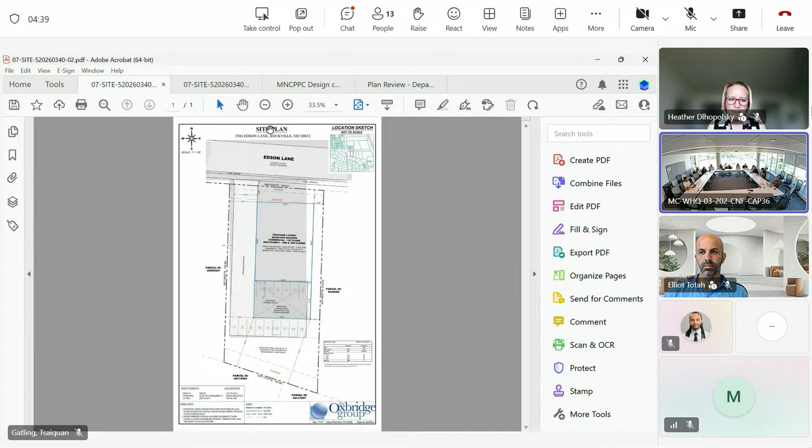Number 2 for DRC, 5506 Edson Lane is a concept plan in the West County area, and for your information, this meeting is being recorded. Go ahead, Tsaiquan. Good morning, everyone. I'm Tsaiquan Gatling, lead reviewer for this concept plan. The plan presented 2 concepts for the site at 5506 Edson Lane in Rockville, and you should have received comments on Friday. And I also followed up with design comments that unfortunately didn't make it into DRC, into E-plans. So I'll turn it over to the applicant for any questions they have.

I'll note as a concept plan, this application ends here, and we'll see if you come back in for a development plan in the future. So with that, I'll pass it to the applicant. Great. Thank you so much, Tsaiquan. Can everybody hear me okay? Yes. Okay, great. So Heather Dlhopolsky, land use and zoning attorney with Wire Gill. And I apologize, I'm getting over being sick. I also have Elliot Totah. He is the applicant here.

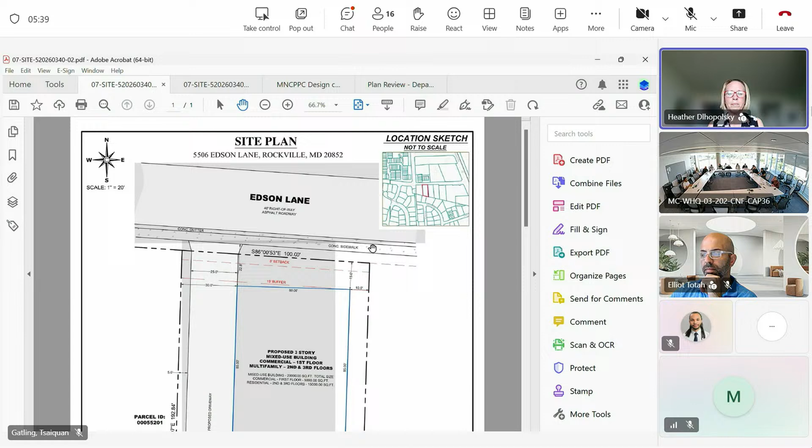We very much appreciated the opportunity to submit this concept plan. We received all of your comments and reviewed them. I think overall, we're definitely happy to see that the county and Park and Planning seemed supportive of rezoning here to allow development close to the corridor, Rockville Pike corridor. We did have some questions. I think some questions that are fairly quick. I think a few items that probably want to be the subject of more detailed drill down meetings.

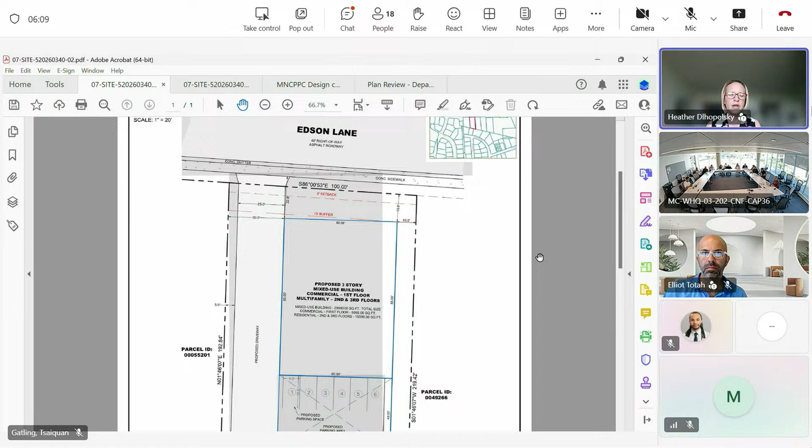So I will start to walk through some of the things that we thought within the 25 minutes that we have, we would have time to touch base on. And then at the end, I think we can just talk about what sort of detailed drill down meetings we want to set on specific items, and then what agencies should be in that. Before we dig in detail, Elliot, did you have anything high level that you wanted to add?

He's muted. Yeah. I saw a hand go up, so I think. Oh, there we go. There we go. No, perfect, I appreciate the opportunity. Thank everybody for the time. Heather, go ahead. I'll jump in as necessary. Okay, perfect. So probably in no real particular order here.

I think Tsaiquan, you had a comment suggesting that we pursue zoning to CRN1 rather than TF. And I think you said that we could maximize residential density to 1 and commercial density to 1 for maximum flexibility. And we certainly love that idea. I think our concern there was that if you look at section 535A2, which is the CR zone floating zone standards, and if a floating zone is not recommended in a master plan, the following density limits apply.

Because we are currently CRN and we're less than a ½ acre site, the total density can go up to a 1 FAR, but the C or the R component is showing as limited to only a 0.75, which would not accommodate the density here that we were proposing under the townhouse option. So that was our concern. Maybe I'm not reading it right and I'm missing something and there's more flexibility than I thought, but we just wanted to probe that a little bit.

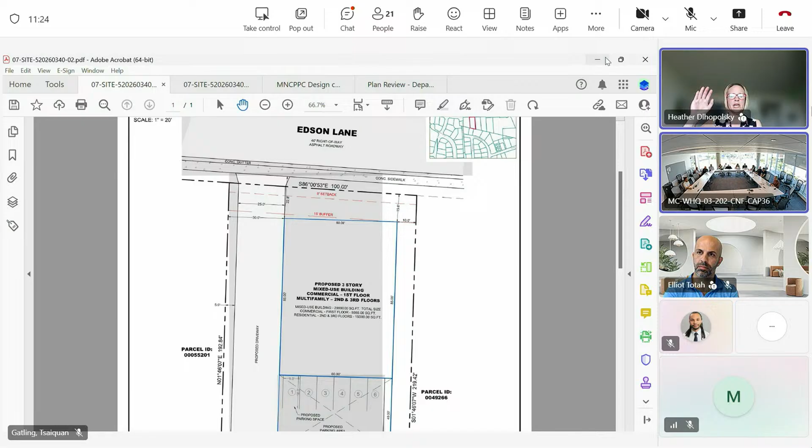I think that's probably actually something of a good segue into what we see as sort of the biggest issues here. So it seemed high level from the comments that folks are supportive of rezoning, but obviously, as with everything, the devil's in the details. And I think it's so common on projects, especially at the concept plan phase, that one of the main constraints that we're trying to hammer out are right of way and frontage improvements. Because obviously, if an additional 15 feet of right of way dedication is needed, then there were also comments about shared use bike path, sidewalk width, and then coming into the site itself.

There were numerous comments about if it's more than 4 units, and we were showing 6, it would need to be built to public road standard. But then there was another comment that actually suggested narrowing the driveway width to 12 feet, I believe it was, in order to allow for restructuring and relocation of open space. So there was a lot of, I'll just call them constraints comments. And we wanted to just probe staff's thinking a little bit more, both on the street frontage and right of way side, but then certainly coming into the site, which also relates to fire access as well.

I think this probably wants to be the subject of a more specific drill down meeting, likely with MNCPPC, MCDOT, and certainly fire access is a component as well. But just wanted to get staff's thoughts a little bit more in terms of the street frontage and then also, again, access coming into the site. Whoever wants to jump in.

Yeah, I can start. This is Florence Dwyer. So yes, like we said, if there's more than 4 lots, then it can't just be a driveway. It could be an alley, but it would have to be to those public standards. And then the dedication for sure will need to happen for the specific frontage improvements. We put in there what Complete Streets and the Bicycle Master Plan calls for. There's always a possibility of interim conditions, but we would want to start with what's in the master plan and the Complete Streets design guidelines. Okay. And for a public alley, if that's what's required to come into the site, do you happen to know the width that would be?

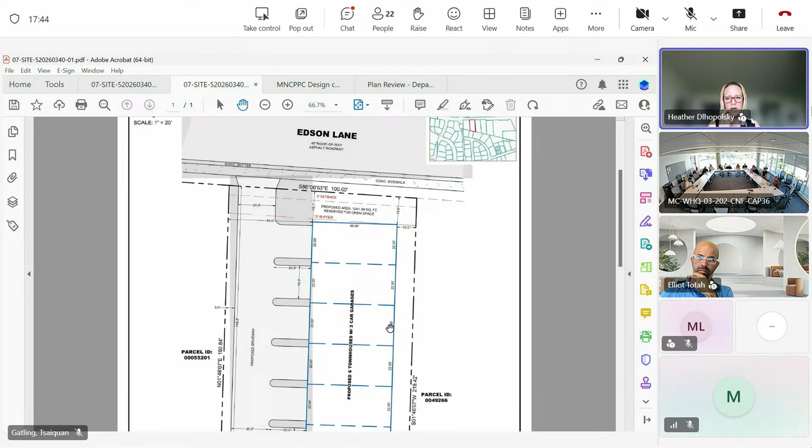All right. Just looking through, I think frankly a lot of the comments relate to or flow from exactly what we're talking about right now. It's like you start pulling the thread and all of the other pieces get involved. So the fire access issue, the number of units, whether it's public alley or driveway, obviously the open space then flows from that, because we're talking about site layout and where can we have open space such that it meets the definition of open space and is usable and accessible to the public.

I don't know, Elliot, are there other specific comments that you want to go over on this meeting? Again, I think probably these, I'll just call them layout and frontage issues, want to be a deeper discussion and maybe pulling in the civil at that point. But are there other topics that you want to cover on this meeting, Elliot?

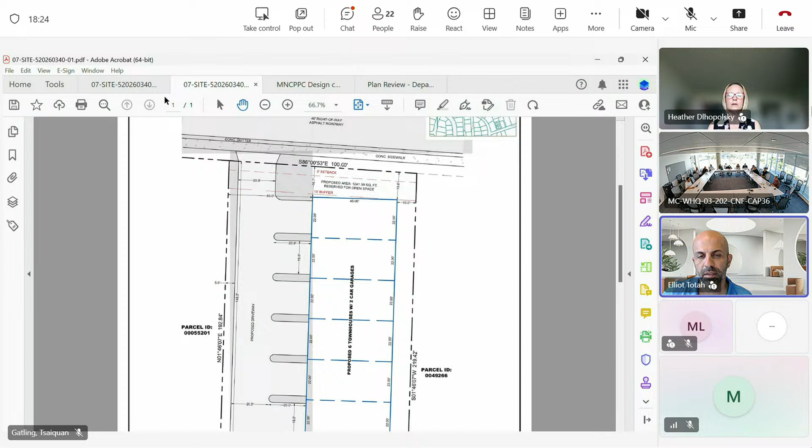I think I'd like to broadly ask, and thank you, Heather, for leading us so far. But I think the broader question I'd like to ask is that we submitted two concepts, right? Two different concepts, one townhome, one mixed-use multifamily. And I'd love to get the staff's impression. One contemplates remaining within the CRN zone, but simply adding density. The TF, obviously, moving to another zone entirely, and each one sort of presents its own unique set of circumstances in terms of the development limitations, the envelope, the fire access, etc.

I would love to get some perspective from staff generally. We only have a limited amount of time, and as to which one maybe strikes them as more viable, given the various constraints, both from a rezoning and land use perspective, as well as from an actual implementation of development, given all the constraints that we've started to speak about.

Sure. So I'll start with that and then pass off to my other planning teammates if they have any comments as well, but we wanted to just make sure you presented your reasoning so we can consider that. And I think staying within the CRN offers you some sort of flexibility that is currently there. And with the density change that Heather mentioned, you'd be able to maintain that flexibility going forward in terms of what can go on the site. I know our design team had thoughts as well, and if anyone else had comments too.

Yeah, this is Natasha from the design team. So as Tsaiquan said, we thought CRN will provide more flexibility for you. And it helps more in creating street-oriented development rather than the TF. And those townhome developments, you can still do under the CRN zone. So our suggestion is leaning more towards CRN. So that's our take.

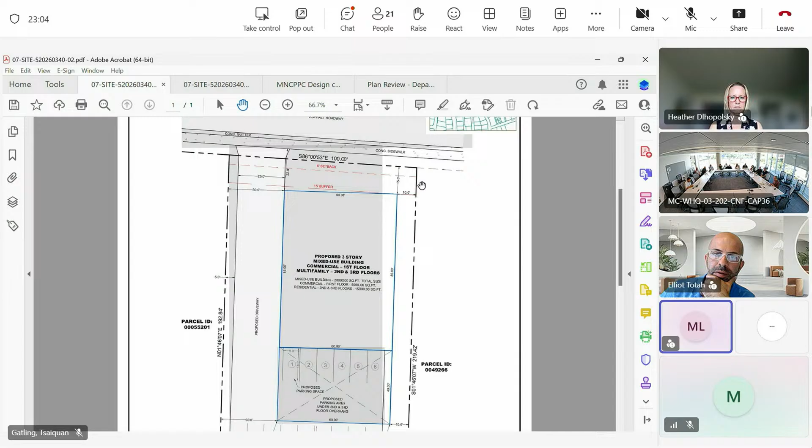Yeah, and I would appreciate, Marie, your two cents, since we do have a couple extra minutes, on the comment that Sandra just made regarding fire access when we do have the one building, how that's treated. So if you oriented your lobby toward Edison Lane, then she's correct in that you have to meet 50 feet to main side entrance door.

You also have to provide 15-foot clear and walkable along all exposed exterior walls. So you couldn't shove it up against the property line. And you need to figure out how to do that at the back. But she's definitely correct in that the primary truck access from Edison would probably be easier to accommodate with a mixed-use building.

15 feet along all exposed exterior walls, yep. Now, if you have no openings in those walls, then that requirement can be foregone. But if you have walls that have windows and whatnot for your residents, then they have to be accessible for ladder access, hence the 15 feet.

Gotcha. Okay. So for example, what's showing on plan view, I guess, right, 10 feet, it looks like we'd be having to shift that a little bit. We could probably work with 10. I cannot work with less than 10. Okay, good to know. So that'd be a discussion item, but workable. Okay, good to know.

And Elliot, just to add to what Marie said, so from a fire department access, as you heard, there's advantages to have the main door of the building on Edison Lane. And also from an urban design perspective, that's what we would recommend, that the front door of the building is on Edison Lane, so that pedestrians can have direct access to the sidewalk.

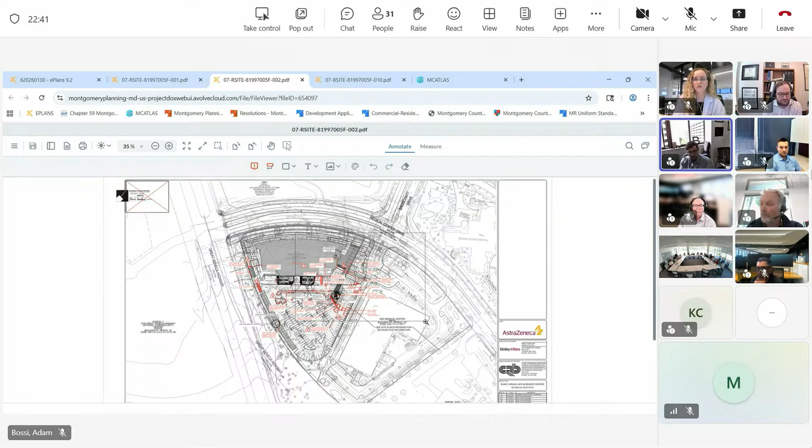Good morning, everyone. So we received a number of comments related to fire access, and we're happy to take these comments offline, but I just wanted to go over a general response that may clarify the existing condition out on the site. So much of the existing condition that relates to fire was approved during the site plan amendment C by previous owners and previous engineers. So we received a number of comments related to curb radii, fire hydrant placement, hose pull length. We're not altering that condition.

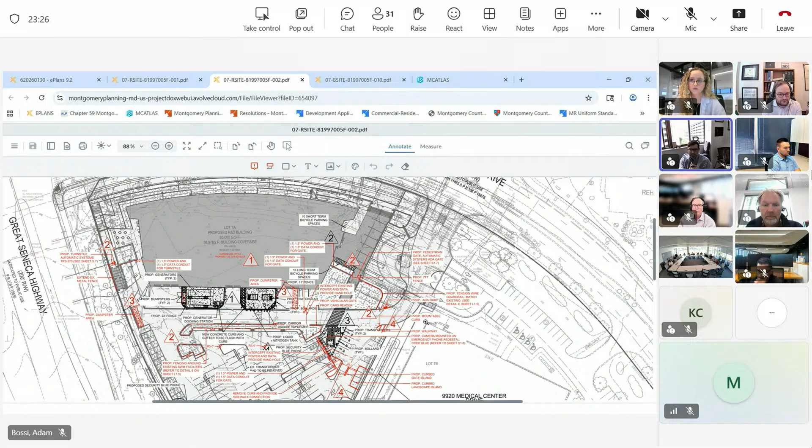It exists today. And I think some of the reason for the concern is the format of the plan. You can see, just due to the nature of this being revised a number of times, you have a multitude of existing conditions that overlap one another. And this also relates to the public open space comments that maybe we can get into later, but there's an existing photo that I can share that I think may clarify some of this. So this is a response letter we've prepared. If everybody can see this photograph. We can see it. Thank you.

Yeah. So this is the public open space area. When the project was originally entitled and permitted, there was a large circular drop-off area located here where I'm gesturing. And when we began work on the site, this had all been built. So some of the comments relate to fire access and hose pulls and such. So this is Marie LaBaw. All the comments came from me. I'm your fire department access reviewer.

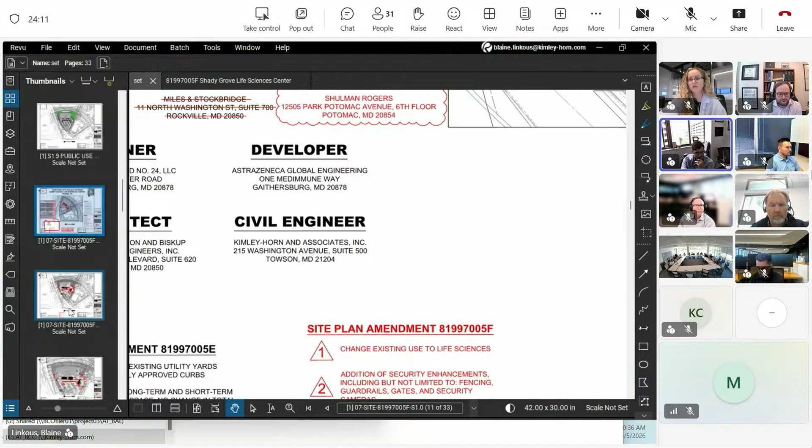When this was approved, it was approved with that circle, and it was approved to get the main lobby door of the building within 50 feet of edge of pavement. That does not appear to be the case today. I don't know how that happened, but you cannot make it worse than what the approved condition was. So if something was built that was not approved, that's not something that can remain. So we can take this offline. We can talk about that. That was the biggest hangup. Everything else pretty much looked like existing condition paperwork.

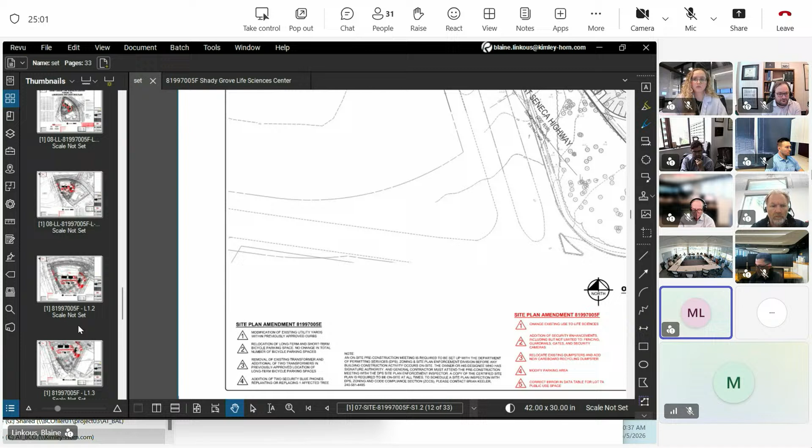But that circle and distance from main lobby door per prescriptive code should have never been further than 50 feet. Right. So we can work with that. We're not altering it. We didn't alter it. It was approved in Amendment C, and that same condition exists today. Well, we'll have to go back and look at my records because it shouldn't have been. Okay. Sure. Anything else for fire department access you want to discuss? No. Okay.

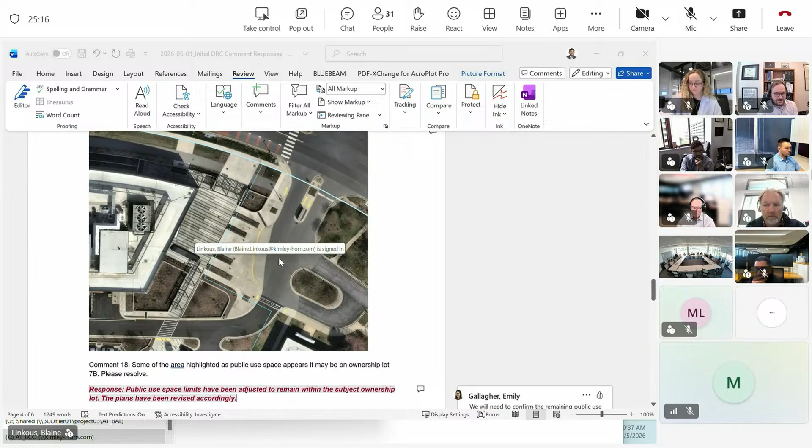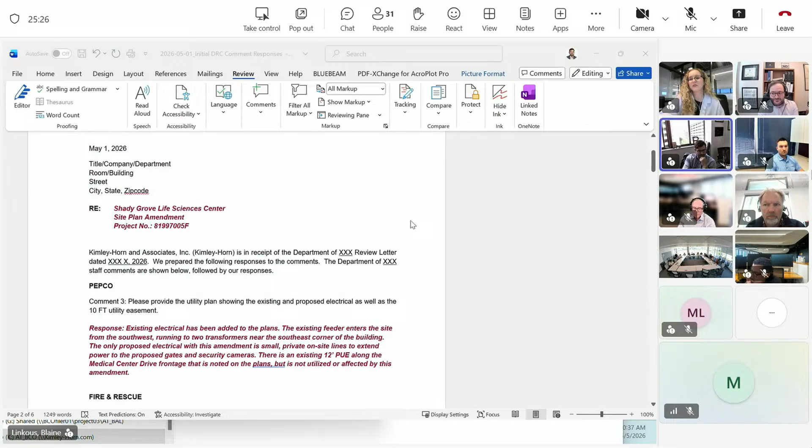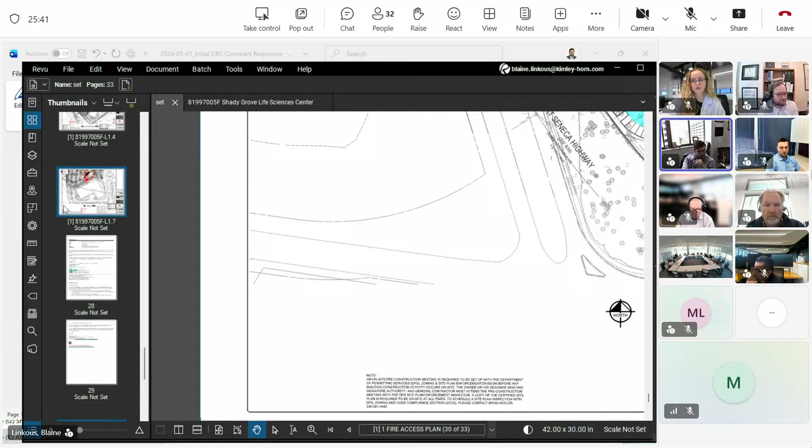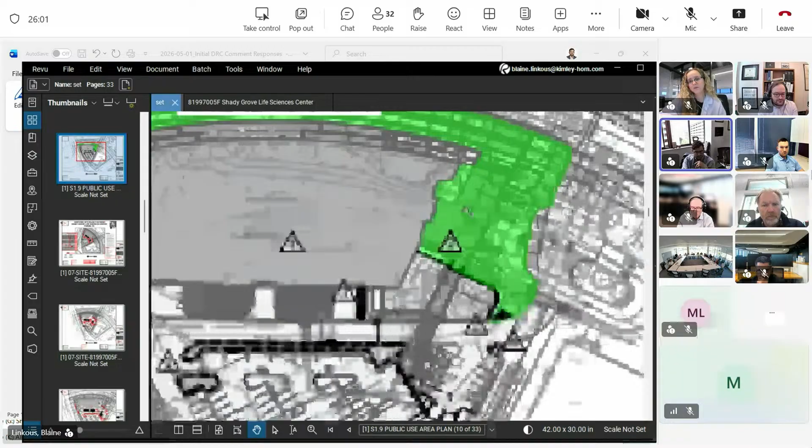Phil, should I continue on with the other comments that we received? Sorry, muted. I think we want to talk about public use space next. Yes. So I think the same issue, and I can share the public use plan that we submitted. The same issue may be throwing people off with the public use because there's a couple of issues at play here. One issue is the fact that we got the comment you can't have vehicle circulation in the public use space. That's because I believe the reviewer thought that this curve was a proposed condition. That's not the case. This is simply the existing condition that is all pedestrian hardscape.

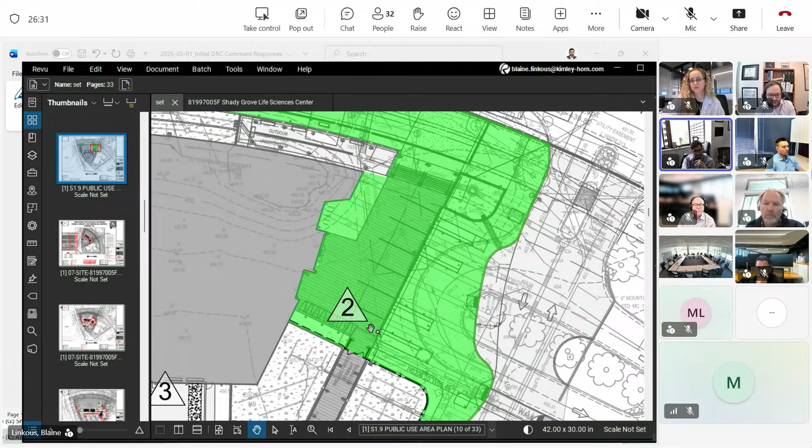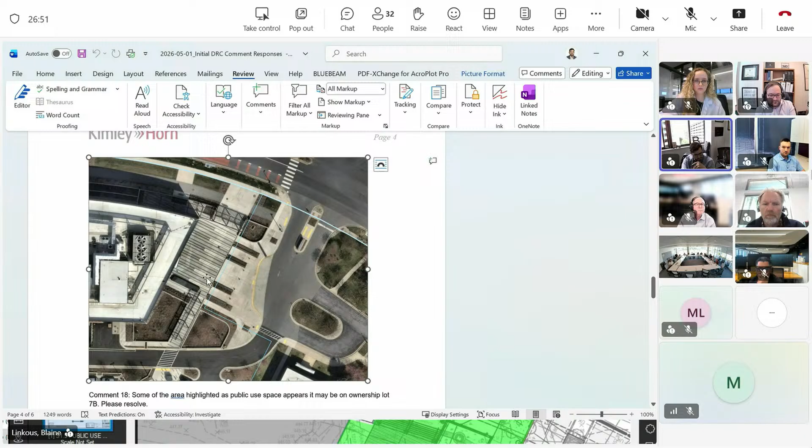These are not parking spaces. These are planters and hardscape features. And you can see that in the image. So it's just confusing due to the amount of line work and revision that has happened here. So they look like parking spaces on the plan, but they're not. They're pavers, and these are planters, and this is all the public use space. The other issue is we received a comment that said the ownership parcel, like the lease lines, are not reflective of the public use space. So we have more than the revised amount that was transmitted earlier in this green box, but not all of it is on the subdivision, lot 7A versus 7B.

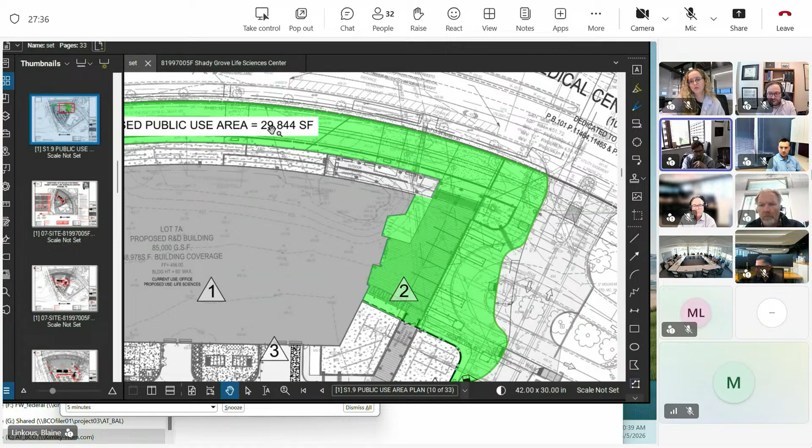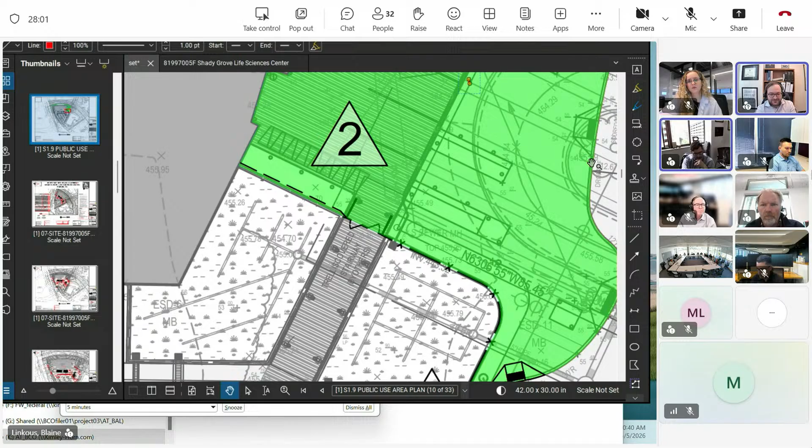So we just wanted to clarify, is that truly a requirement that we can only show public use area on our subdivision line? Because that subdivision line sort of goes, it's not consistent with a physical feature anymore. It's really right here. This line right here is the lot line. Wait, Blaine, just to clarify, when you're talking about lot line, you're talking about ownership lot line and not subdivision lot line? Yes.

Ownership lot line. Yeah, so those were comments from me, and it just sounds basically like clarification type things. I think you're gonna have enough public open space. You do need to show that your ownership lot 7A, that you are meeting or above that 24,719. That appears to be the correct number. I think you're gonna have that, but you just need to make sure that that ownership lot line is there, because there was the division and the requirement between the sites, as well as the kind of sum of both of them. So each one does need to stand on its own in that respect, with the way the different amendments have played out.

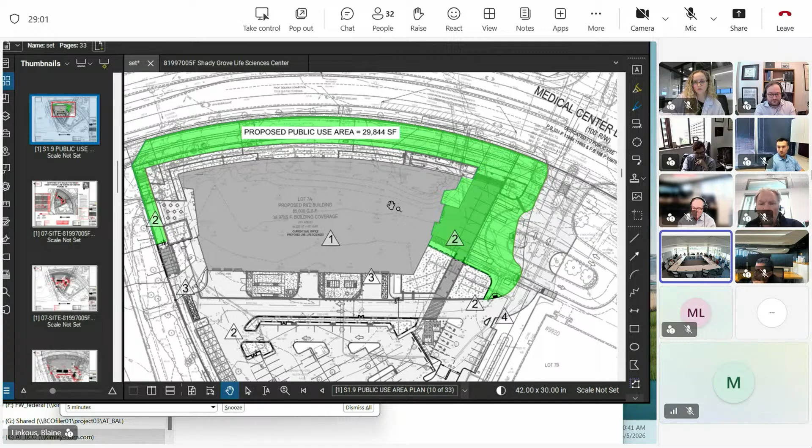So if you can show where that ownership lot line is there, and whatever is on 7A is on 7A. As far as regarding the vehicle area, if that's a pedestrian area, if there's a way to drop. Hey, if I can jump back in real quick, I was able to pull up my approval, and it does show shared access into the public space for truck access. Do you want me to share my screen and I can do that? Go ahead.

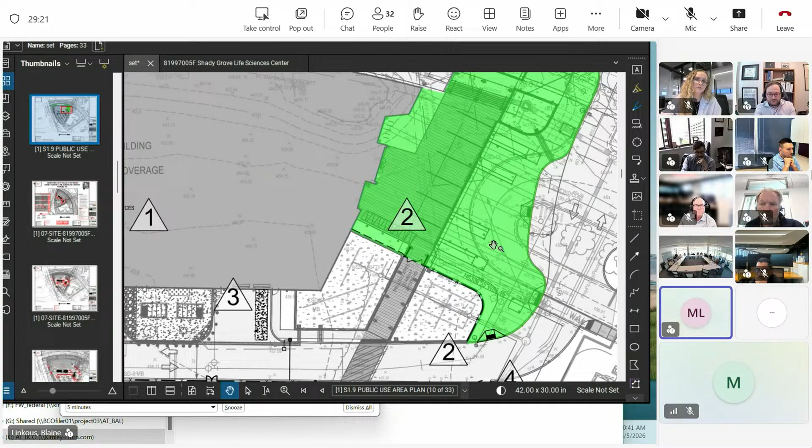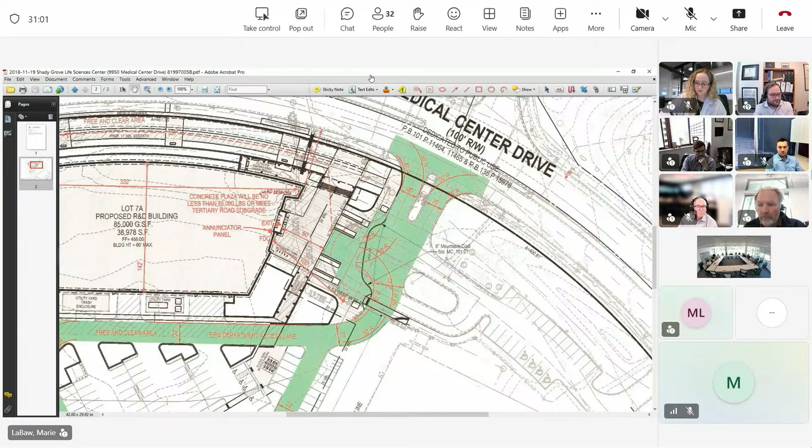And team, do we know if that curb right now is a mountable type? I believe it is. So it is mountable. You can drive up on that curb. Okay. So if this is what exists, this is what needs to be shown to me when you come back for your fire department access approval. Then tying it back into open space. Thanks, Marie. Thank you for bringing that up right now. Yeah. If anybody wants a copy of it, let me know. I'll email it out. Yes, please.

So I'd say with the green area that Marie was showing on her plan for vehicular movement, in that same area, that's the light colored pedestrian paved area. Remove that from the public open space if that's the necessary space for vehicular movement. But it looked like that would also come out of ownership lot B's and not 7A. So check that. And I'd be happy to look at that again with you too after this. Yep, understood.

Adam, I did have one question. I think there's just a typo on comment 19. What we got reads, please the Y right-of-way dedication and associated. I think there's maybe a word missing or a typo. Can you just please clarify that comment? Yeah, let me share my screen again. Thank you. Second here.

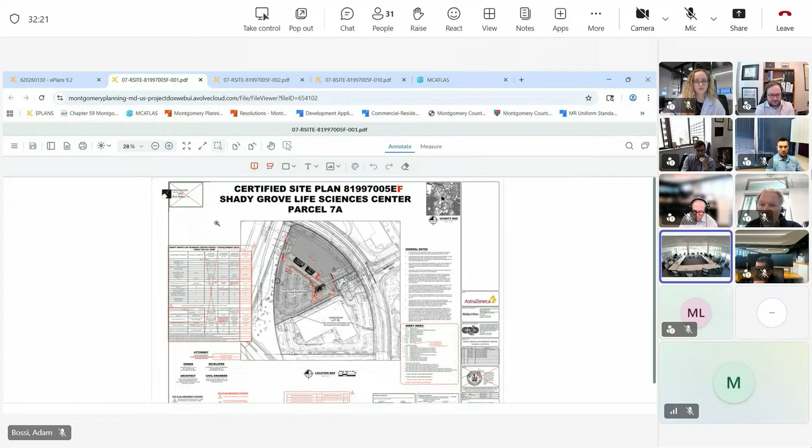So that had to do with revisions to your data table. There was a line on here. I'm not sure if this is something that tied back into the E amendment, because that was the last place I saw it. Looking right here at the line item for right-of-way dedication for CCT. So that's what that question was asking about. Could you explain why it's shown on there and why are we looking at a net tract area reduction? That's something I didn't see anything in the statement of justification. I saw something in a prior plan about it, but I just wasn't sure if it was being carried forward now and maybe wasn't before.

Yeah, my intuition tells me it's just being carried forward. It's not a new dedication, but if you can confirm. Right. I concur. It was carried forward from the previous amendment. And unfortunately, the CCT doesn't even exist anymore, so I don't think we'd be dedicating for that. At least a new dedication. Okay, cool, thank you.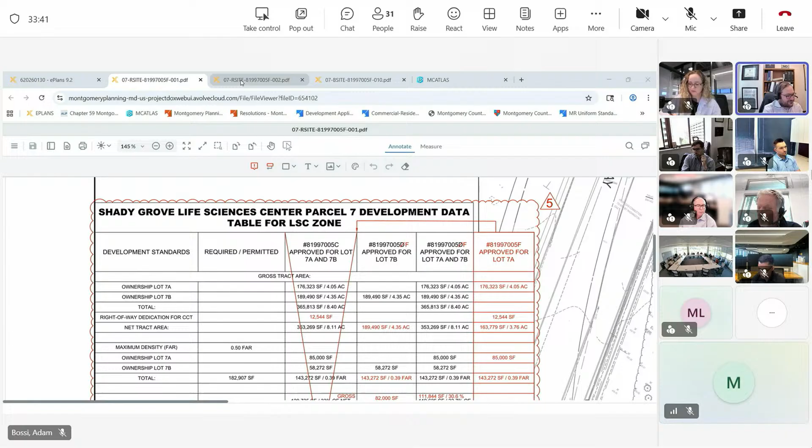And then I did have a question from transportation planning staff. Just to confirm, we are not making any modifications to the existing right-of-way. There was a comment about providing cross-sections for all abutting streets. We just wanted to see why that's being requested if we're not proposing any changes to existing conditions. Yeah, this is just in with the transportation planning division. So I've asked for cross-sections, that's a standard for us. We need to see what's existing right now. So it's just illustrating what's currently there.

I know that I also outlined the recommendations under the bicycle master plan, which is only if there's outside improvement, then you will trigger that. But as for now, just cross-sections. So for Great Seneca Highway and Medical Center Drive, you want cross-section drawings of existing conditions? Yes, that's it. Okay. And then I think I understand what you're looking for in the circulation drawing, showing pedestrian, bicycle, vehicular circulation. It's just like that line drawing that shows the different pathways for the different modes. Is that what that's requesting? Yes, just a circulation drawing showing the in and out of vehicle circulation, pedestrian and bicycle circulation. Okay. I think those were all the questions I had on the comments.

Before we sign off, I did want to confirm with Adam what the resubmission schedule is. We're really trying to keep to the July 30th date. Our deadline falls in the middle of August. So we're really hoping to shoot for the last hearing date in July, and we're going to do all we can to meet that. So just wanted to confirm what the resubmission schedule will be to make sure we can still hit that as a target.

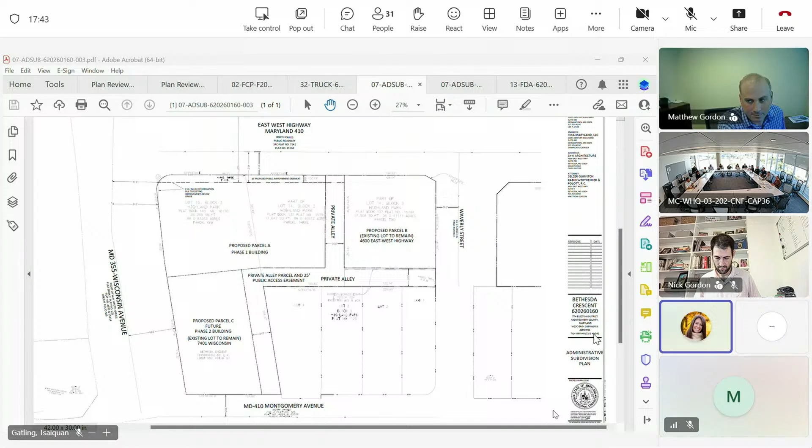Yes. And another resubmission 5 days later? The 26th is the magic date for July 30th. Okay, well, I just want to make sure we understand what we need to do, because obviously if we submit on May 20th, we're not going to get comments in time to turn around and resubmit again 5 days later. Matt, so I would aim for the 26th, and that would have to be final and perfect. And then I can move forward for that.

So again, we're all on a condensed time frame. And so the resubmittal dates, unfortunately, the way they play out, you just don't have the time in between them for something like this, for a first and a final. So you're really just looking at a final. Yeah, and I appreciate that. We just want to make sure we can deliver on our end.

But you could also submit early. You could do a first submission at any time. So if you could knock out all the comments in a week, send them in a week. And then you can do that as many times as you want up until May 26th. Okay. So we'll follow up and coordinate. I spoke with Deepak yesterday to clarify some of these things. So we'll just go through a couple things, but I think the main... Just for a second. Yeah.

For the benefit of anyone listening, the schedule compression, I just want to say for the record, this is the first application in advance of the commercial to residential reconstruction. So we're working to get you all in line with that, and that impacts the schedule. So I'll just let you go from there.

Yeah. Thank you, Isaiquan. For the section, I think there was some confusion for Wisconsin Avenue and East West. So we met with SHA early. There's an existing garage that is located beneath the right of way on a lot of East West and/or the proposed right of way, as well as Wisconsin. So we've worked out an arrangement with SHA where we'll provide a public improvement easement so that we can meet the master plan width, but we can't dedicate because the garage is there.

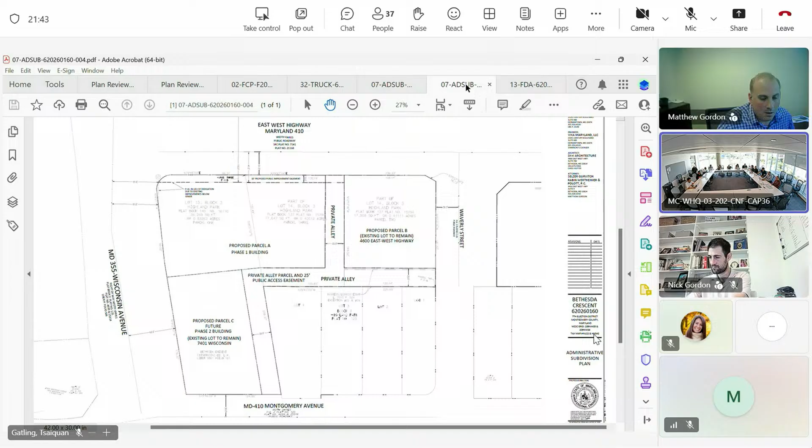And then the second thing is, I was unable to submit my comment in time. So the specific analysis that SHA is requesting, Isaiquan provided that comment for you. So if you could follow the directive from Isaiquan, that is the exact language from SHA regarding the analysis for East West Highway. I saw the comment. Katie, you understand what they're looking for, right? Yes, we do. Okay.

I think that's all we have. So we're going to clean up the plans, and we'll touch base with Isaiquan and Stephanie and Elza in terms of timeline and let you know, but we'll certainly meet the 26th at worst. But if we can knock out most of these comments sooner, then we'll do that. But I think we're comfortable that we can address all these comments.

Okay, thank you. If you guys are happy with transportation, you're awaiting some things from the applicant to take care of those comments, we'll be communicating. This is Deepak here. Just wanted to mention that you probably need to coordinate with Justin Willits, the BRT group, regarding the right-of-way on MD 355. So just wanted to put it out there that you just need something in writing from him as well. Just please include me.

Okay. What's the right-of-way for the BRT? It's 122 feet, so I just want to make sure, they have a station right south of it. Where's south of this property? Yeah. So please coordinate with him. Yeah, Deepak, when we get some of the updated clarification on the sections, et cetera, I'll send you an email and I'll copy Leah and Justin, and we're happy to talk with him about that.

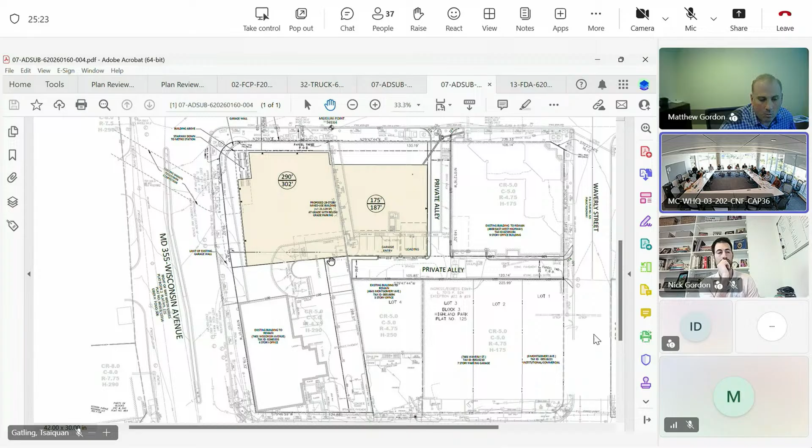Yeah, it sure looks like the building is right on the existing right-of-way, and we have more than the 122, or I guess the 61. Okay, but we should see what size the station is and figure out where it's going to go. So if we come in later and we want to put the station there, and if there's space there, we're not telling you to remove the building, but if there's a place for us to locate it, we have the ability to do that. Yeah, we're fine with that, we'll set up the meeting and talk about it and see what Justin is thinking there.

A clarifying question, and I guess this is for you, Isaiquan. This project is coming in 2 phases. At this time, we've only evaluated phase 1. Will it basically come in as a second admin sub for the CRR? So will it be phase one admin sub CRR, phase two admin sub CRR? Matt, have you guys planned for that? We would probably amend this plan if there's additional redevelopment along Montgomery. But right now, we don't know what the timing or schedule could be. Okay, we're just making sure that for the access questions, phase two will be reevaluated at that time, it sounds like. Yeah, we would show additional details for that alley that's there today, so we can address that at that time.

Okay, and I just wanted to tie up that last comment regarding the BRT station, since that wasn't included in the list of comments and there's going to be a meeting set up. Please include comment on that in your resubmit so we'll know what's happening there and can keep track of that situation. Okay, yeah, I think there was a DOT comment that said to talk to Justin. I didn't understand. No, I think we understand why. So we'll reach out to him.

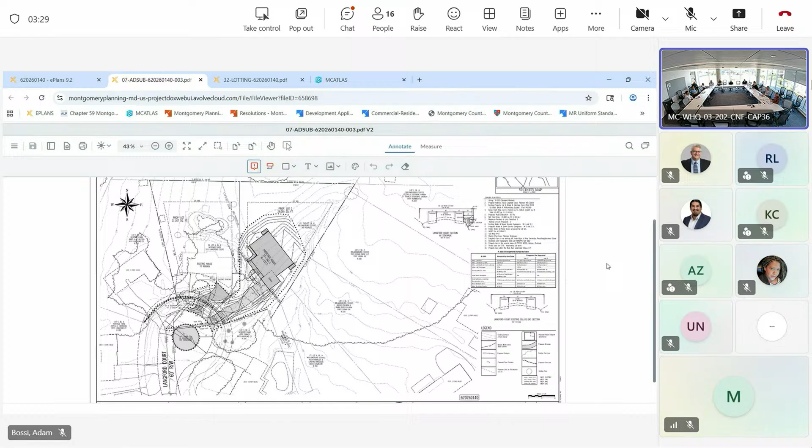Last item for DRC, item 59313 Langford Court. Administrative subdivision plan and forest conservation plan in West County. Go ahead whenever you're ready. Thanks, Neil. Adam Bossi for the record. We have the applicant and his engineer here, Jeff and Hamed. Thank you for joining us this morning.

So this is an administrative subdivision and an associated FCP. This is proposing to convert one existing lot, one existing outlot into two single-family lots to maintain one existing dwelling and add another one. The key issues that were identified in our staff review, there were three of them really. One had to do with the FCP, and that feedback focused on meeting the Chapter 22A requirements through forest banking or fee in lieu instead of the easements that are proposed.

The second issue that was identified really focused on the access arrangement that's shown here on the screen, really where the two driveways are coming together with the cul-de-sac. Transportation planning, DOT, DPS, and fire all had some comments for you on that point. And then the remaining review comments generally focused on just various technical revisions to the plans and clarifications, things of that nature. So that's just a quick overview. So Jeff and Hamed, I'll turn it over to you guys to ask your questions of us.

All right. It looks like probably a lot of the comments that I saw were around the driveway, and we were showing separate driveways for the lots. Reasoning for that was more from a marketing standpoint. People tend to prefer having their own driveway. In this case, it does create a little bit extra curve, especially for that existing, trying to tie back into that existing one.

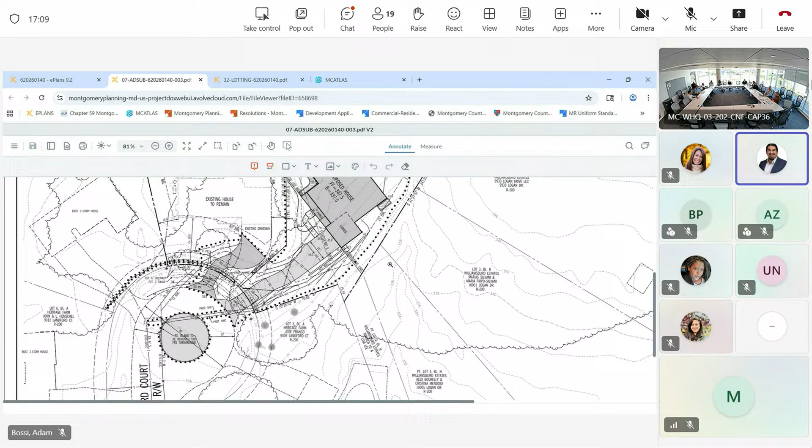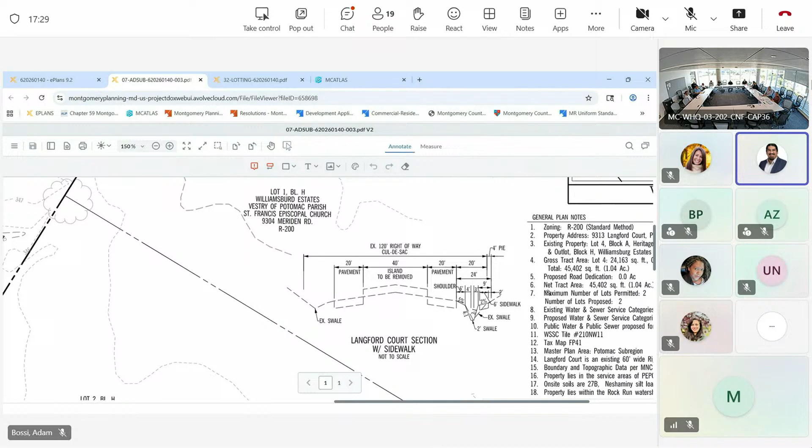And if you can, just make sure you represent it in your cross section as well. The way that the cross section was submitted was a little confusing. So, I know we still need to figure out the easements and the dedications and whatnot. So once everything is assessed and the final design of the swale is determined as well, if we can get an updated version of the overall cross section, it'll be very helpful. Okay, all right. We can do that.

Is there an existing swale out there? Yes. Okay, so would this change the swale? Yeah, right now it's sort of the old V ditch, and you can change it to a flat bottom. We have to do it, yeah. The only thing we need to take a look at is what utilities are out there, whether or not that might kick in that first modification or the first waiver phase. But yeah, that would kind of shift it back, basically. Other than that, there's some minor stuff we might talk to some folks about afterwards, but those were the major points.

Great. Yeah, and we're happy to continue following up with you. We want to see you be successful through this process. This came through last fall as a concept plan, which I think helped a lot in terms of setting the configuration of the property. I think that was very beneficial. So looking forward to getting through the rest of the process with you. That's great. Does anybody else have any questions or comments on Langford Court? Did you give the dates?